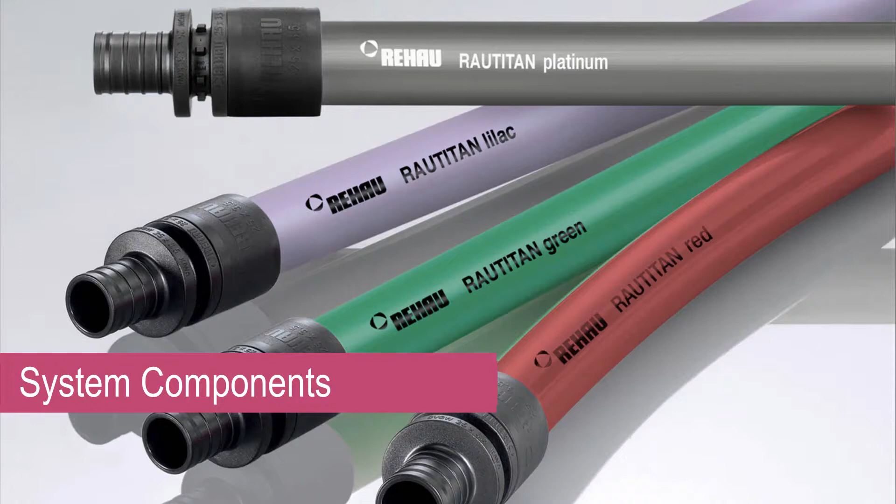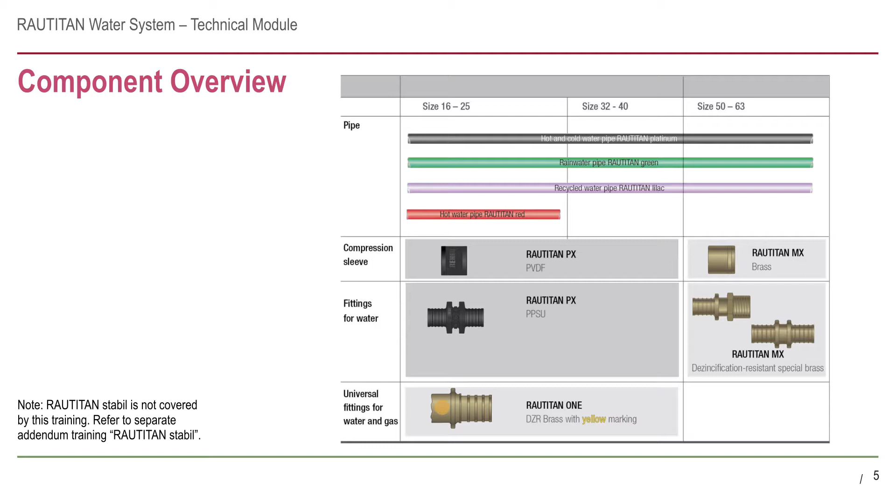System components. The first section of this training course aims to familiarize you with all the components of the Rautitan water system. The Rautitan water system comprises the Rautitan PEX pipes from 16 to 63 mm, Rautitan polymer PX compression sleeves and PX fittings from 16 to 40 mm, Rautitan MX brass compression sleeves and fittings for 50 and 63 mm, and the universal Rautitan ONE DZR brass fittings from 16 to 40 mm.

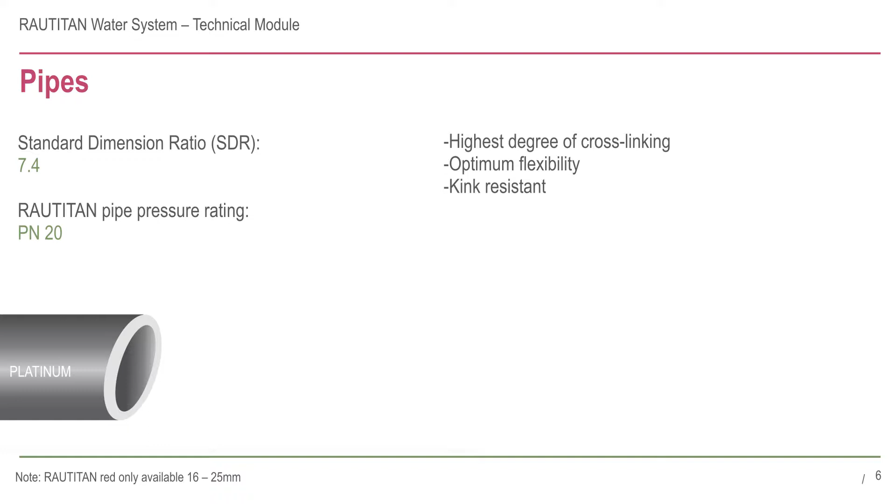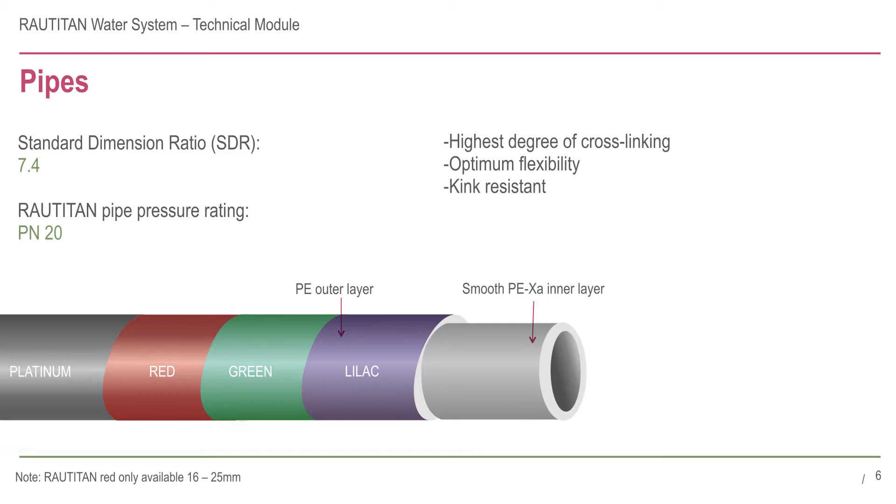There are 4 types of Rautitan PEX water pipes: platinum for hot and cold water, red for hot water, green for rainwater, and lilac for recycled water. They are virtually identical, with the colour of the outer layer being the main difference. The Rautitan PEX pipes are SDR 7.4 and are pressure-rated PN20. Being PEX gives Rautitan pipes greater kink resistance and flexibility. The pipe maintains its stability and shape after being bent, which allows for more control during installation and fewer fittings.

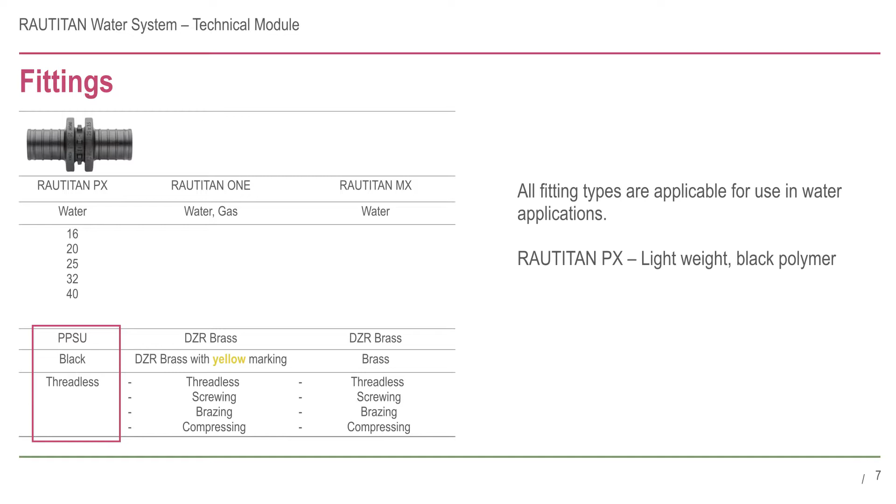For fittings in water applications, there are PX polymer fittings for sizes 16 to 40 mm. They are lightweight PPSU material, black in colour and easily distinguishable from the brass fittings. There are also MX DZR brass fittings for 50 and 63 mm sizes only. For both water and gas, the Rautitan ONE DZR brass fittings are available in sizes 16 to 40 mm and feature a yellow dot to clearly indicate they are universal.

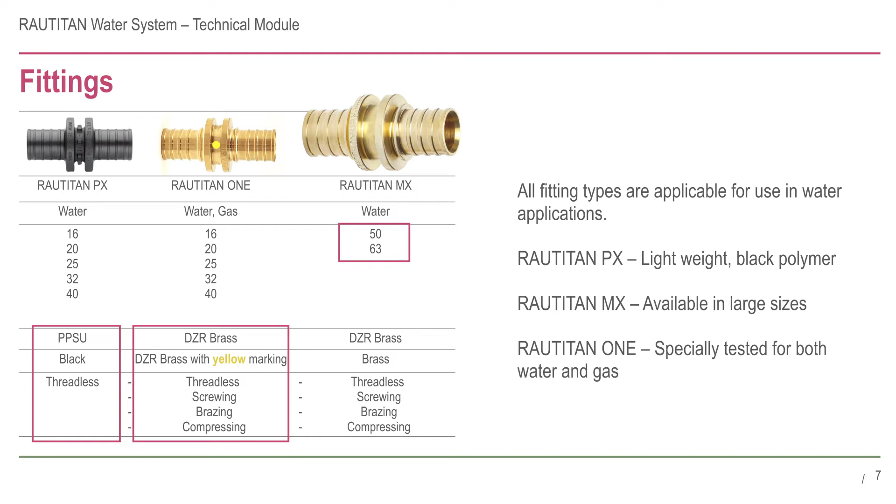The details of this will be covered in greater depth in the Rautitan gas training. It is vital that you understand the correct fitting to use in the correct application and how to easily identify them. The Rautitan range also consists of different types of sleeves to suit different applications.

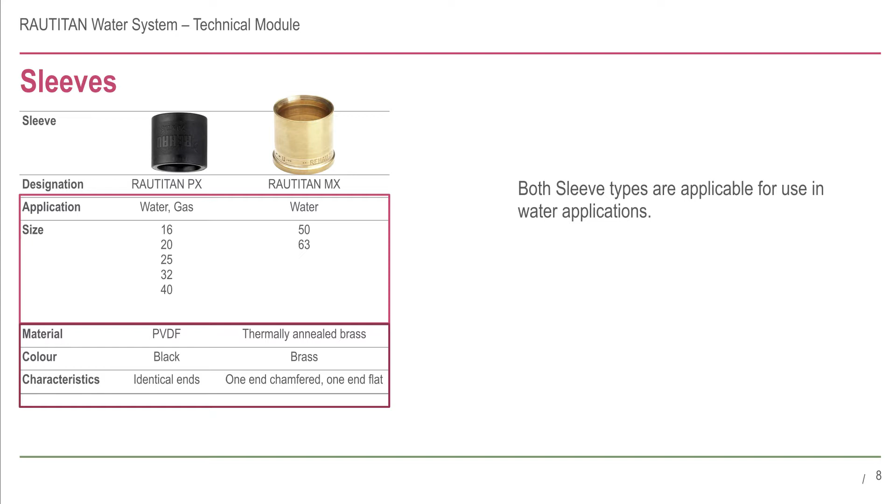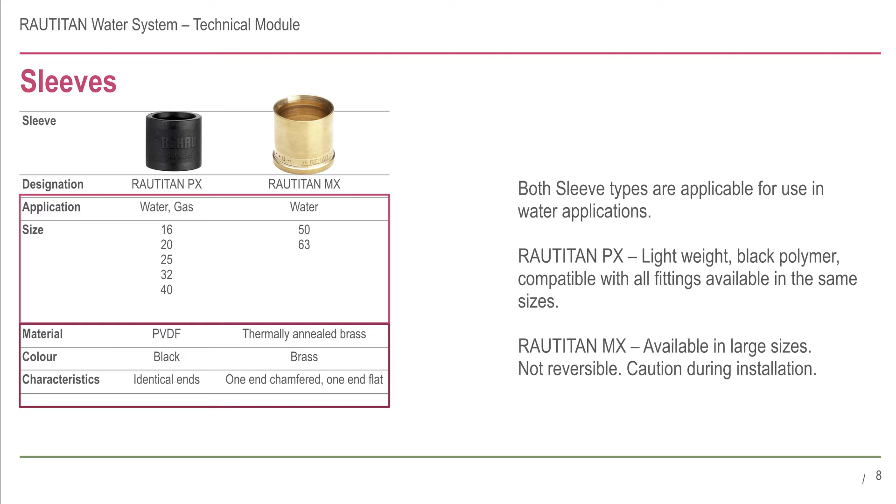The lightweight black universal PVDF sleeve is reversible and used in the smaller sizes in water and gas. The larger MX sleeves are made of brass and easily distinguishable in size and material. Both sleeve types are only available in the sizes that suit their respective fittings. In that way, there is no confusion or mismatch. It is important, however, to note the chamfered end of one side of the MX sleeve. This means it is only able to be compressed onto the pipe in one direction. This will be discussed further in the assembly instructions.

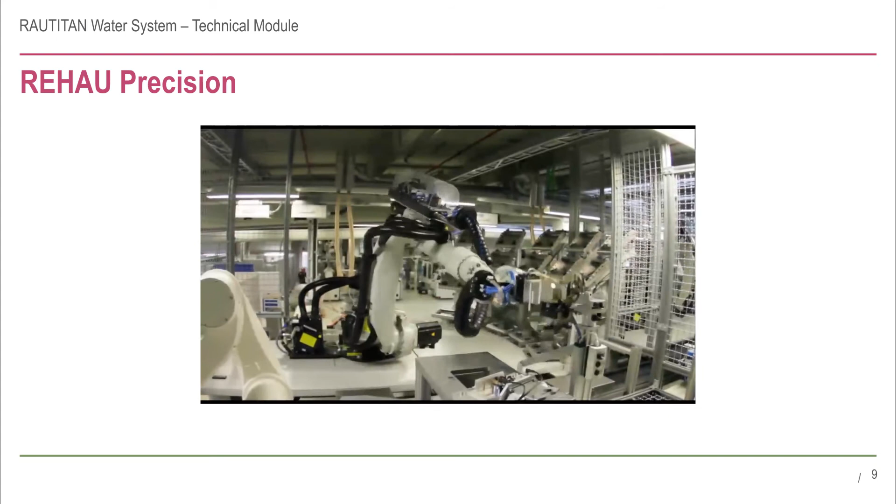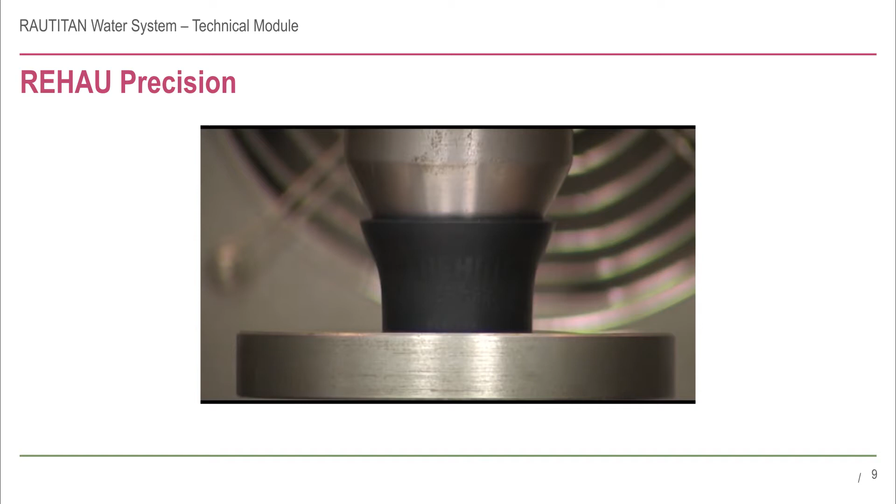Rehau products uphold a high degree of quality and precision by utilising advanced manufacturing techniques and stringent quality control. While this results in superior properties, including durability, trained Rehau authorised installers should aim to make the most of these properties by also conducting their own work in a precise way, with a high level of quality in mind.

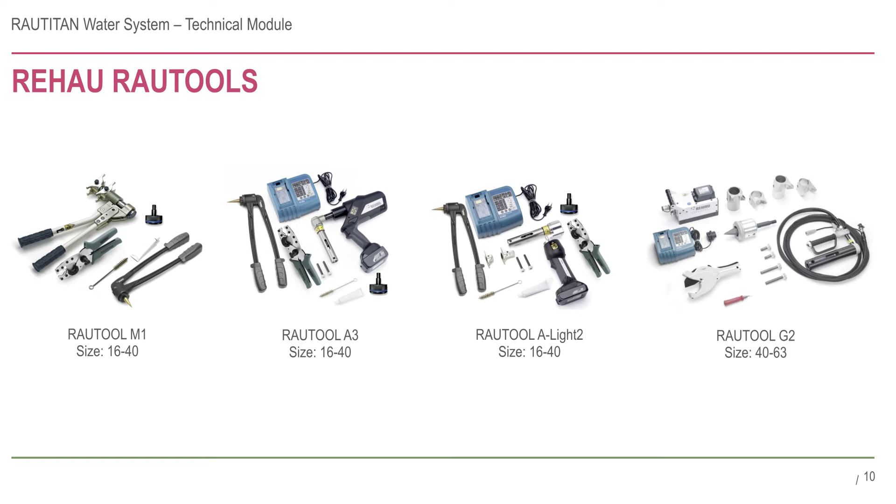Rehau Rautool kits for water applications consist of an expander tool, expander heads, a compression tool, and a pipe cutter. The Red Pipe Cutter 40 is the most versatile cutter for standard Rautitan PEX pipes and can be used on sizes 16 to 40 mm.

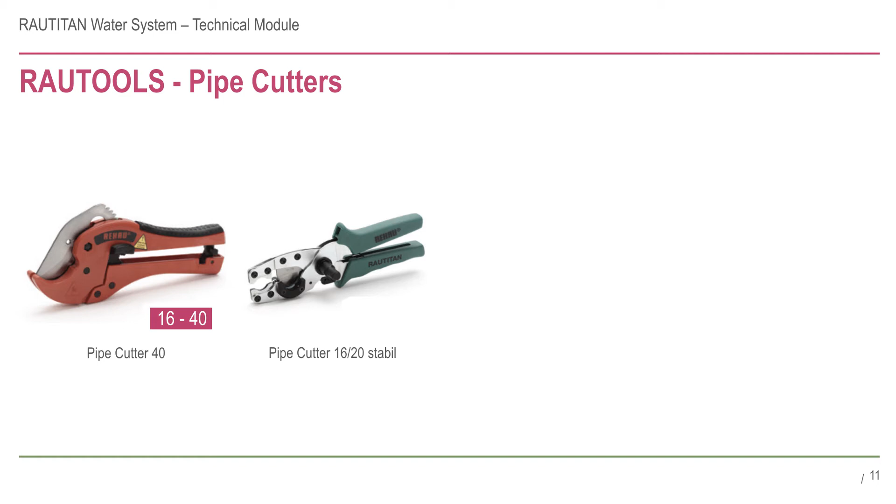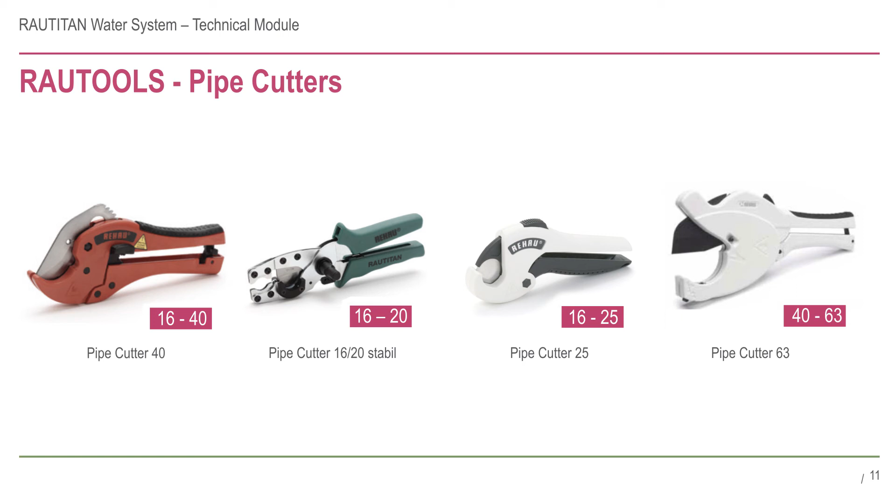The Green Stabil Pipe Cutter is specifically designed for the Rautitan Stabil and Gas Stabil pipes. However, it can also be used for sizes 16 and 20 mm standard PEX pipes. The lightweight Pipe Cutter 25 can be used on PEX pipes only. Finally, the Pipe Cutter 63 is suited for use on larger pipe sizes, from 40 to 63 mm. Always be sure to check you have the correct pipe cutter to suit the pipe you're cutting. If you have any doubts, consult the Rautitan technical information for a complete cross-reference.

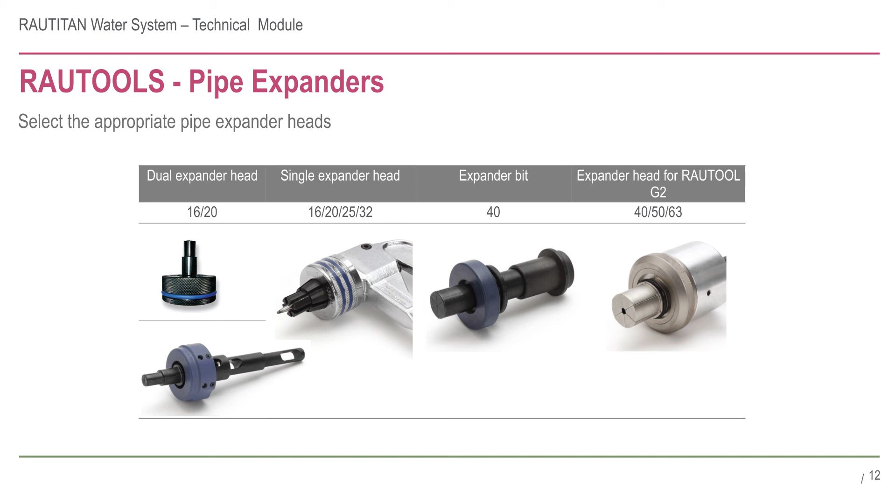You'll be expanding the pipe using either a manual or battery-powered expander tool. Always ensure you use only the blue expander heads meant for water applications with PEX pipes. Do not use the green-coloured expander heads with tapered ends, as these are designed for the Rautitan Stabil and Gas Stabil pipes and can cause the pipe to be incorrectly expanded.